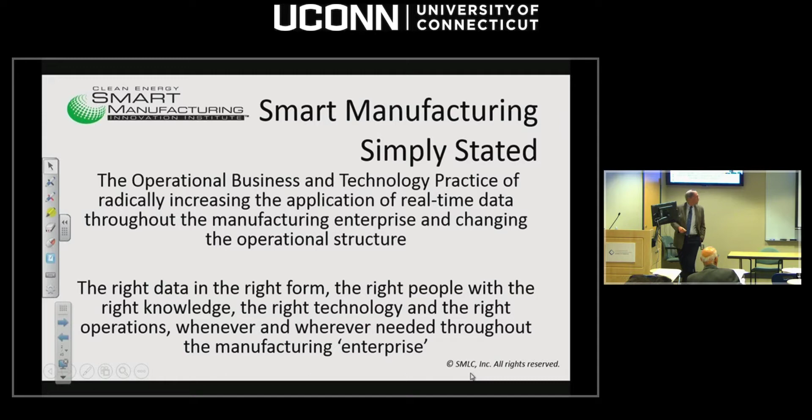The other one is a definition we've used quite a bit, and you can kind of read it from a data standpoint. Where the opportunity rests, we've looked at probably 100 different applications with different companies, different industry sectors, and so forth. And they all kind of boil down to these three areas. And I wanted to just kind of get these on the table and get the vocabulary on the table.

The first is very simply just untapped market productivity and performance. So if you can do things with the enterprise much more dynamically, there is a huge amount of opportunity. What we have tended to see is if you think about it from a revenue standpoint or a savings standpoint, almost everything we look at starts at about 15% and then goes up from there. So if you think about 15%, that's actually quite a substantial savings. And so you can think about number one as 15%, and then when you begin to understand the process from its enterprise standpoint, it goes up from there.

Real-time data and modeling to qualify materials. This is the part about if you can really understand the precision of the materials, really understand the precision of the parts that you're talking about, really understand where they're coming from, and if you can use data to drive this precision, there actually are significant revenue opportunities moving forward there, especially as we move into trade spaces that have more customization, value added to these different products that are based on individual customers.

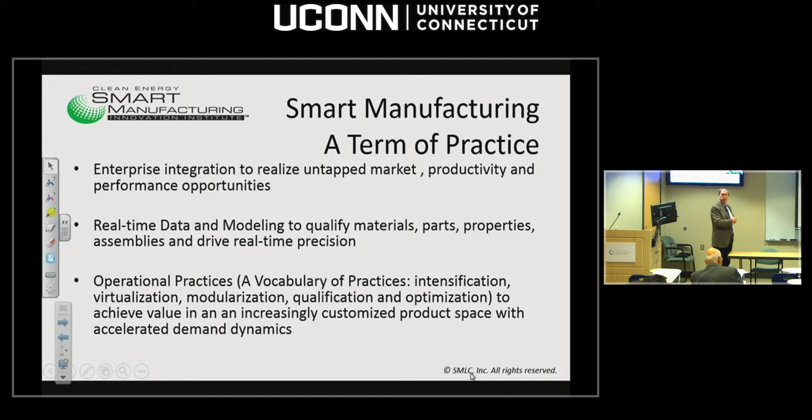It's really about dynamics and demand response, agility. How can you move among products, contracts, all sorts of things faster and more easily? And if you can do that, there actually is a great deal of market potential going forward. So this is what we mean by this, and we want to start talking about this as a term of practice. It's really not a technology.

There's a lot that gets put up here around Internet of Things and the Industrial Internet Consortium. And these are being used a lot. And I wanted to just stress with this slide that if you look at Internet of Things, it actually is extremely broad. So if you look at the two together, we're talking about consumer products, manufacturing, cities, agriculture, transportation.

So when you put all those together and think about the devices, yes, there's a huge number of devices that are being connected to various networks. But from a manufacturing standpoint, the breadth of those is so large, it's actually hard to get at the specific things that are peculiar to manufacturing. And so one of the things we want to do from a Smart Manufacturing Institute standpoint is actually look at IoT in a vertical sense and focus just on manufacturing.

So this list of things to the left has come through a lot of discussions with companies. What are the things that are peculiar to manufacturing that we really do need to take into account? I won't go through all of these, but it's actually quite interesting. One is I end up on a lot of panels about drones and driverless vehicles and manufacturing. So why do the three get put together? Well, they're all talking about cyberspaces. They're all talking about interconnected devices on networks, but they're very different, right?

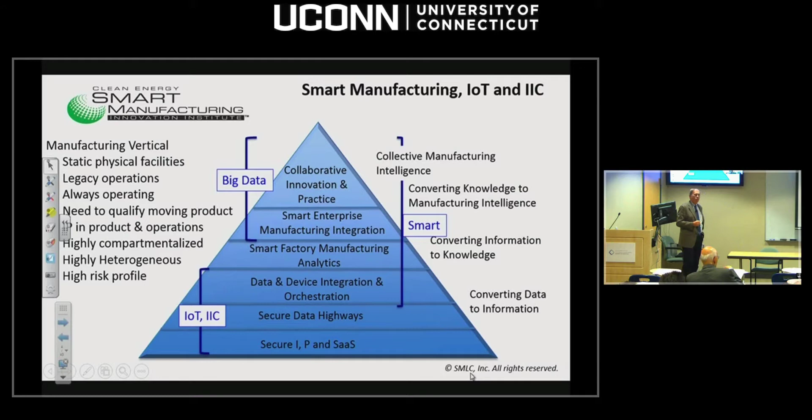And if you start moving up this pyramid, the pinnacle is what are the advantages of actually sharing some data or sharing some capabilities, sharing some patterns of activity, and where does reusability exist? So I'll talk about that a bit more in a minute as well. So I hope that gives you a little bit of a flavor for at least some definitions. And what I'd like to do is dive into some examples and tell you a little bit about what CESMII

is. First of all, CESMII as an institute is a collection of 5 regional manufacturing centers, as we call it. So you in Connecticut are actually associated with a regional manufacturing center, which we call the Northeast. And we base the operation at RPI, the Center for Automation Technologies and Systems, but it includes Connecticut, a major effort, major kinds of capabilities being brought to the table, as well as MIT with Penn State, and then the industry in the area is what is of great interest here.

And so you can think about the kinds of industries that are here. You start seeing capabilities building out. So with UTRC and aerospace, glass is large here, microelectronics and so forth. So these are the kinds of industries in your area that there's been a lot of expertise built up. And so what we're interested in doing is now embedding smart manufacturing in this region relative to those kinds of

industries. And if you go around the country, you'll see other areas of emphasis relative to the manufacturing companies. And this is a way for us to let these things develop with those differences around the country. So it's a powerful concept in our opinion. Anyway, it's the idea of how do you take the institute to manufacturing as opposed to trying to get the manufacturing to come to the institute. We want to take it back out this way.

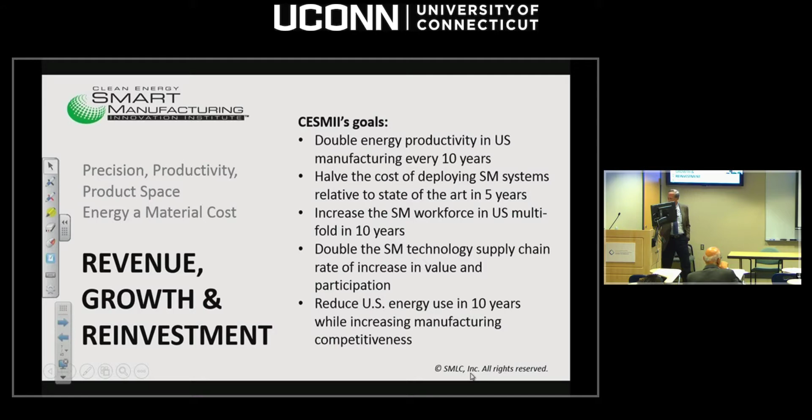So one of the things we will say over and over again is if you go after energy in its own right without dealing with productivity, workforce, all these sorts of things, you don't get there. But if you go after productivity, revenue, better use of materials and so forth, energy falls out and actually becomes a competitive advantage. So we're actually looking at not to reduce costs, but actually build manufacturing up in a way that there is growth and opportunity for reinvestment. And then that's how one can get at a reduced energy consumption.

Typically, what is the energy cost in manufacturing? What fraction? Well, let's see. If you look at it across the U.S. and across all energy, it's about a third. So third residential, third transportation, third industry, roughly speaking. No, like in manufacturing, what is the cost within a manufacturing facility typically? I guess it depends, but yeah, you mean in a facility? Right, it's a little hard to do. Labor. Yeah, it's hard to. It's actually hard to say because it depends on the segment, the industry sector.

But if I go back here, the DOE actually defined what they call energy-intensive industries. So these are oil and gas, chemical, cement, glass, and so forth. That actually represents probably about 75% of the manufacturing energy. If you get into aerospace and some of those which don't use energy, but the parts do, now you add up the rest of it. So even our institute is probably at about 20% of the total manufacturing energy use. Yeah, the other thing to point out too is well over 90% of manufacturing is in small companies, small and medium companies.

And so we're really talking about lots and lots of small companies, and then we have to work with a large company. So that's where the supply chain comes into play. It's an important question. So let me take you through a couple of really quick examples to kind of illustrate what smart manufacturing is about, and then I'll get into some of the technologies.

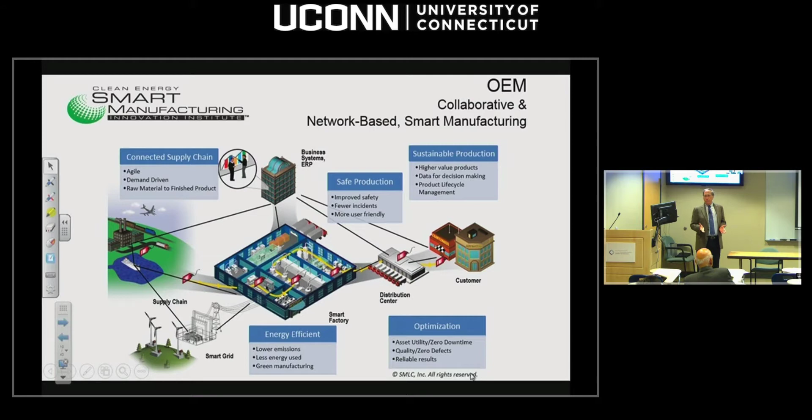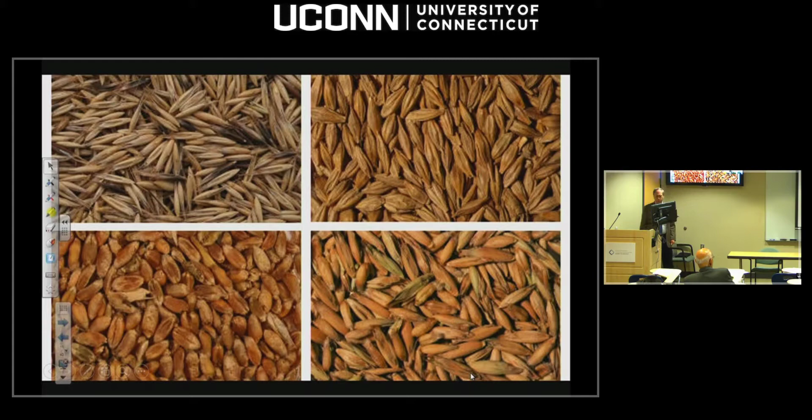Oh, I had the pictures out of order. This is the answer to an oat is not an oat is not an oat. They come in from all different kinds, but you have to make the Cheerios taste the same. So the supply chain side of this, though, is actually quite interesting.

This is actually a sort of a graphic of the bin management system, or the silos that exist at the Minneapolis plant. And you can see that those silos have all different kinds of characteristics of those oats sitting in those silos. So if I'm going to make a certain amount of Cheerios, I need to know which silo I can use for that. I need to know to avoid these other kinds of silos.

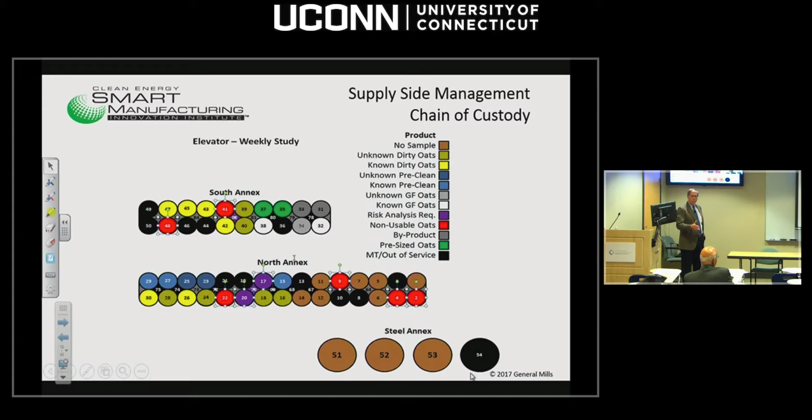So how do I know what I have in these silos at any given time with the variability of the raw materials coming in? That's actually been the problem that General Mills is wanting to solve, and they have been building some models out. So it's really a chain of custody model that's tied in with a recipe management kind of system. So smart manufacturing has been, how can I get all the way from the farm to Walmart end to end with the dynamics of the operation, the manufacturing, the supply chain in this particular case.

A different example, this is Praxair, Port Arthur, Texas. What you're looking at on the left is a little graphic of a steam methane reformer furnace. Just to give you the scale of this thing, it's about 5 stories tall. It's got 360 12-inch diameter tubes. You run methane in here, you break it down, and then the furnace heats it.

Well, what I'm trying to paint is a picture of a very large furnace for this particular reaction that's taking place. And those little things at the top, those are 96 burners that you use to control the heat distribution or energy distribution in the furnace. This thing's been around for 30 years. There's 900 of these around the world, and basically no one's been able to see inside the furnace because of the harsh conditions in order to manage this.

So what happens is you operate the furnace in a very conservative manner because you don't know what the energy distribution is inside, and you avoid burning out the tubes and mechanical failures and so forth. So the question was, what if we could see inside the furnace in real time? So what was done was to put 8 infrared cameras around the outside of this furnace so that you could see the entire geometry. You could also see around all the tubes, and you knew exactly what the energy distribution was.

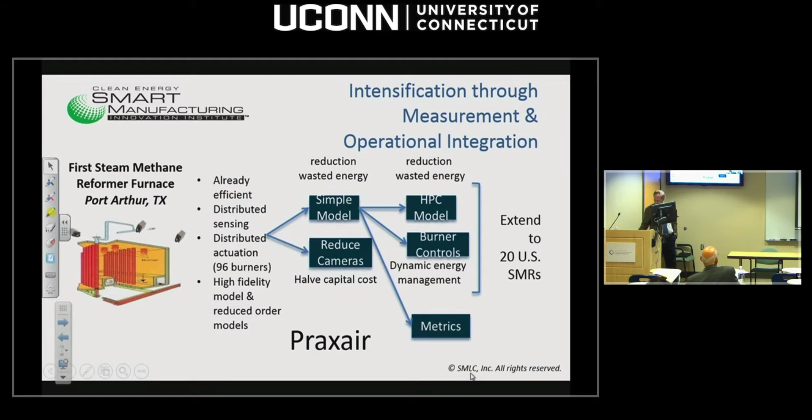In other words, in a smart manufacturing sense, this is about new sensors and new models, image, real-time control, MPC control, moving these things forward, and it's had significant impact on a legacy operation. And where it gets very interesting is Praxair has 20 of these around the country. They already manage their operations from a business standpoint, but what if you could see the operations from an operating standpoint?

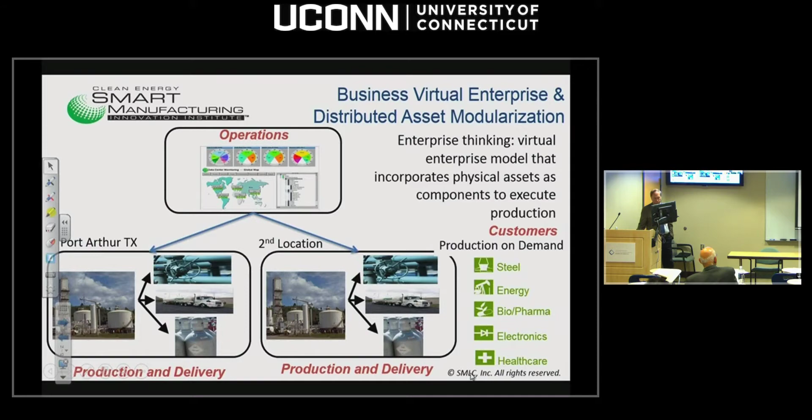So we go to Port Arthur, Texas, you go to the second location. The demand is changing around the country, so you can start adjusting the operations. And so now you get this sense of virtual enterprise on a national scale that's managing the physical facilities around the country, and you tie them in with the distribution chain. This is a huge energy savings for Praxair, but the essence of this one was not energy savings, it was actually energy productivity. They were able to make so much more product, they were making so much more money, that's where the gain came. So it wasn't a reduction in energy consumption, it was a significant increase in productivity.

And one more real quick one here, just to emphasize one other kind. This is in Scranton, Pennsylvania. This is a General Dynamics metals fabricator. They make anything that's got a concentric shape: artillery shells, pipe fittings, a variety of things made out of steel. The way it works is you bring in a steel billet on the left, you go into a forging press.

This is a massive piece of equipment. It heats it up, and then just presses a concentric hole inside that billet so that you get the general shape, but it's got to meet certain tolerances. You shape it, you go to a heat treatment furnace in the middle to basically set the metallurgical properties, and then you go to the machining side to actually shape the part to whatever the contract is requesting. This is an example of a legacy operation that's been around for a long time, where each of the operations was compartmentalized. So literally, you just got the part from the forging press, and then someone handed it over, and it kind of waited there for the heat treatment and so forth.

And so the smart manufacturing aspect of this was, what if I looked at the whole operation at one time? And what I could start doing when I did that is, what if I started managing the properties in real time? So the properties on the first part are geometrical, the properties in the second part are metallurgical, and then the properties on the right-hand side are finished product. What if I looked at those all together?

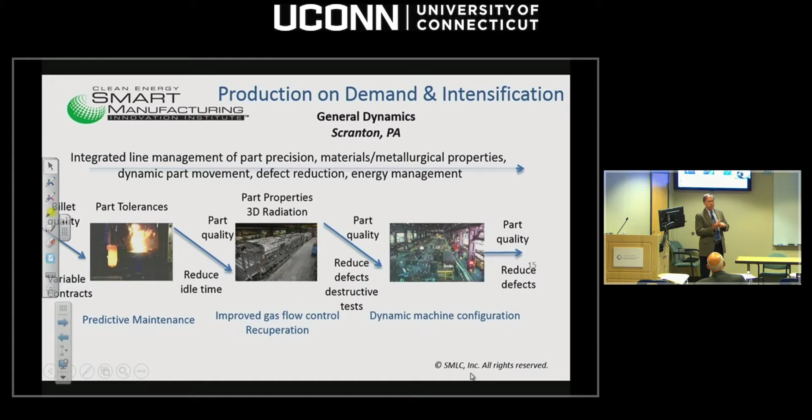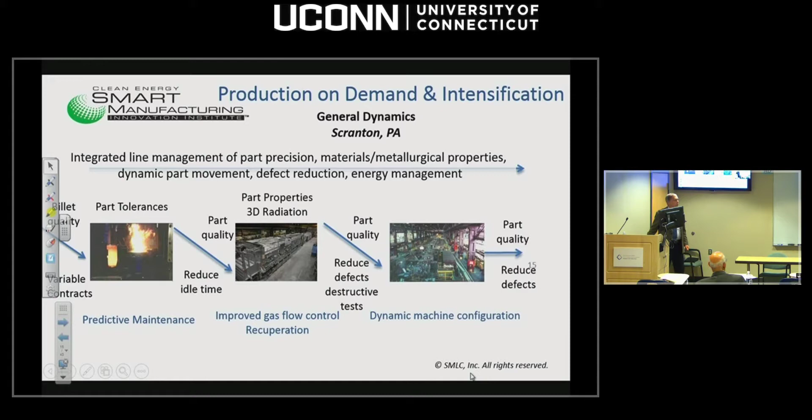Right now if you put a software system into a company, the multiplier factor of that installation is a huge number. It's a huge cost, and it tends to be a one-off system. And so the question is, how can we enable us to do it in a faster way? So, I stuck this one in.

So where we started going down actually has a lot of parallels with healthcare. So I thought I've stuck this in because maybe it relates to this. But if you think about what's been happening with healthcare, right now it's become less and less going to a single place. You go to an urgent care for this, or you may get more information from a pharmacy. There's more and more sensors, wearable sensors that are feeding data in, and so forth.

If you can get that stuff integrated in a right way, and you start working this from a patient record standpoint, if you can have that in an integrated fashion, your healthcare goes up. So we're actually trying to do the same thing, and quite honestly, the product in a manufacturing plant is not too different from us being the product in a healthcare system.

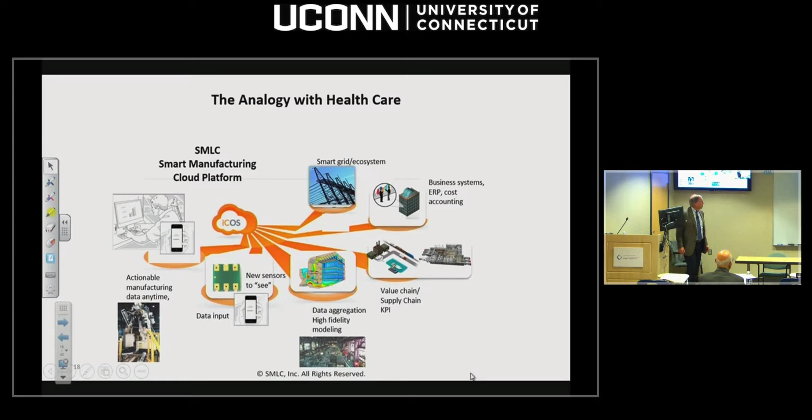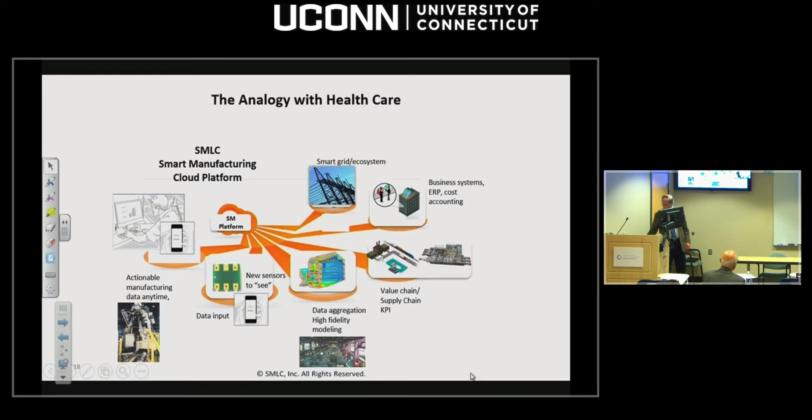So what we're really doing now is saying if I can overlay these different systems, modeling systems, data, input, interfaces, and so forth with an overall system, we should be able to enable this better. And what we call this platform is the Smart Manufacturing Platform. So what I'd like to do is take you through some of the things that we've been building out from that perspective and why. So I'm going to skip through the build on this.

So one of the things, and I was speaking to a couple of folks about this morning. When you look at the manufacturing space, there's a lot of discussion about automation and control, and that's very, very important on the factory side. There are the business systems. For the large companies, it tends to be SAP system. For the small companies, it tends to be Quicken or something like that. We all talk about design, data and design, training, analysis, the integration, and the engineering. So a lot of that is taught in basically every university and all the training.

But there's a space that's in between where you take the control level, we call it the micro level. What if I can extend that? What if I could put an integrated computational materials engineering model? What if I can improve the precision of that control system? The meso level gets at the manufacturing operational level. I'm making decisions about these different things, or about contracts and so forth, and I need to change out conditions. How can I do that in a better way?

And then the top level is basically the supply chain level, if I'm working across companies in different ways. A good example of this one is Corning glass out here. Corning actually makes glass. I guess that's a good reason to call it Corning glass. They make glass, but they contract the manufacture of the material for specialty glass from another company. So it's a supply chain, then they go make the glass. How could you bring those two together, even though they're two different companies, so that they operate in an integrated, controlled fashion? So this is the space that we're talking about.

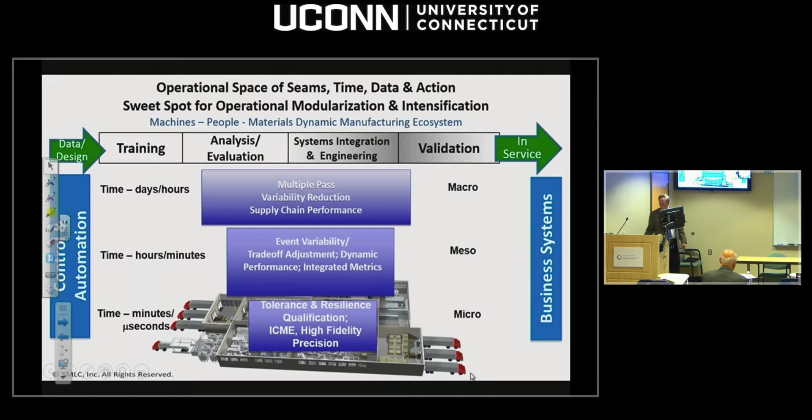And if you think about the Praxair example, it's the micro example. General Dynamics is the meso space. And then the General Mills example is the supply chain macro example. So how do you get the data and everything put together in an appropriate way? So we started looking at the characteristics of this. We just simply call it end-to-end system. If you look at every single system we put in, it has all these components. So no new news here. But variable sensors to some kind of actuation.

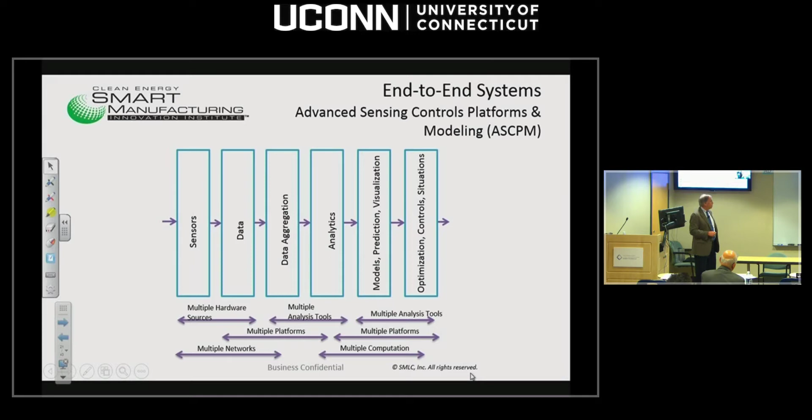But what's significant are these purple arrows underneath. Multiple hardware sources, multiple analysis tools, multiple vendors, multiple platforms, and so forth. These are the one-off systems that we've been talking about. And so when we talk about advanced sensing controls platforms and modeling, the acronym up here, we're actually talking about how do you work across a heterogeneous environment that's going to look like this.

So what we've been asking ourselves is, how do I unpack this, and how can I put some infrastructure in that's going to allow me to manage the integration of all these different systems as appropriate for some business objectives. So a way to look at this is if you look at a typical system, like in this MES space, you'll see the color coding will become apparent in a minute. But one of these one-off systems tends to have different providers, different analytics. It could be on-premise, could be off-premise, but it's all kind of mushed together.

And then if you want to connect it, you've got to connect it to another set of things that are mixed together as well. And now you get a more complicated mix of things. So the thing that we're trying to ask is, how do we unpack this? But the point is that if we keep building these systems up and then try to interconnect them this way, it's just not an efficient way, it's a costly way, and we're just simply not going to get there. And I will point out that it's not secure. It's just not a secure way to do it.

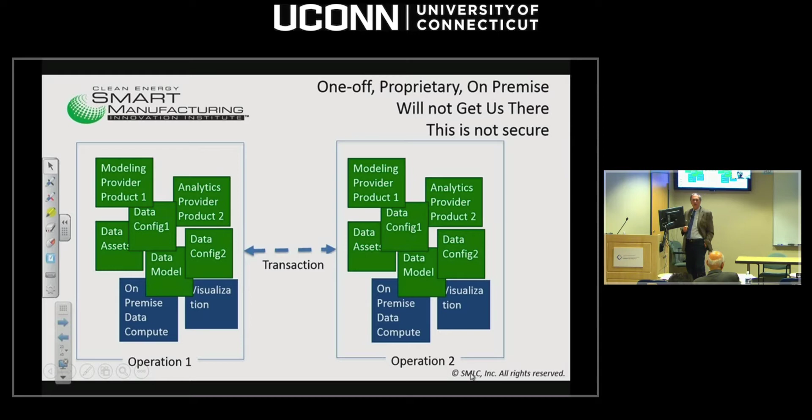And I'm trying to find a good way to stress this one, because if you're going to put these systems together, you have to ask yourself, what do I put them together with? You can think of different constructs, but the one that kept making sense to us, or at least was used most often, was workflow. And so what we're really trying to do with workflow is basically take stuff that tends to be tightly integrated and ask ourselves, can we unpack it and can we reuse it?

So you can see that I've taken data apart in 3 different broad areas, with the recognition that there's a lot more to this, but you have to select data, you have to have a data model, you have to be able to configure the data for different things, you have to configure it again, you get different vendors involved. But if you can unpack these things, at least as we've been building these out, you can reuse components of this and use this to spin up different projects more easily. And then, of course, there's the matter of on-premise and off-premise.

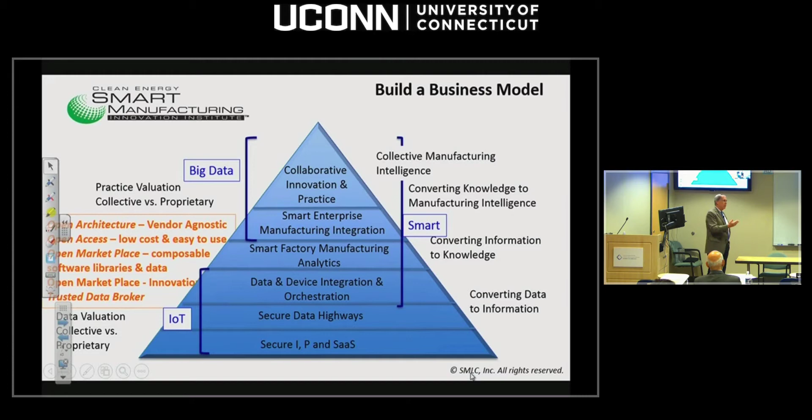But you need to have software of these libraries and the ability of the data services, and then the marketplace for the ability to put innovative products in there in different levels of products so that you get into the development phases going forward. And one of the most important things is the trusted data broker. So this is the notion that most companies don't want to share their data with a proprietary system. Alison, Tim, you can comment on this one. But if there could be a trusted data broker in the sense of a third party that is credible, now there's at least a more open discussion to have on that. So that's where we're trying to go with that piece.

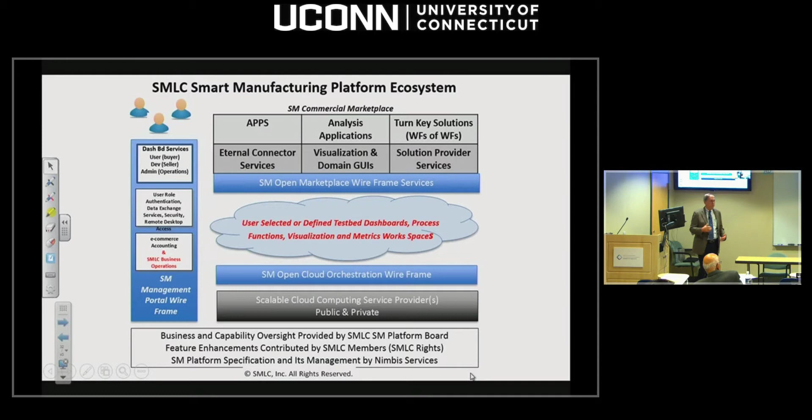But essentially what the SM platform is, and we use the term wireframe, it's a set of services that allows us to slide in this marketplace. It already provides the cloud management, orchestration, the security, those vertical bars that I was showing you. Those all exist, and what we do then is slide in, as I said, the commercial application pieces, and then we can start doing this composability. So we've been building this out for a while. This is what it looks like.

So the marketplace is where you'll have all these vendors providing. Yeah. Actually, we have a deployment layer which can stay more steady, but people do slot things in and out. But the marketplace is much more selectable. It's more the direct application space. Are there fees for that, or?

Yeah. Well, let's see. Some of this is to be determined, but the idea is the wireframe does not cost anything. It's part of the institute. And then the applications in there will depend on what they are. Those will be fee for service in the production sense, but as they're developed, they're just part of the projects going forward.

But if you think about this, and I put a very quick list over here, these are really quite powerful concepts. One is the notion of certified app configurations. So that's different than certified software. It's if this application has been used for a steam methane reformer, I can know that it was used for this kind of steam methane reformer and then have that validated.

There is a very important notion here that you have to kind of think about a bit. If you go back to the internet, one of the things that was most powerful was not a lot of complexity. It was actually just a huge amount of stuff that's actually pretty simple, but you had a search engine that you could find it.

And so one of the things that's really quite interesting to us in this configuration space is with the cloud, we now have the capacity to build that configuration space into a huge, just like an app store. It could be a huge amount of variations and different pieces, just slight variations. But if you could have a search engine to find them, you actually get to something that's internet-like from a manufacturing standpoint. And if you can compose and reuse those, now you've got something that is quite powerful.

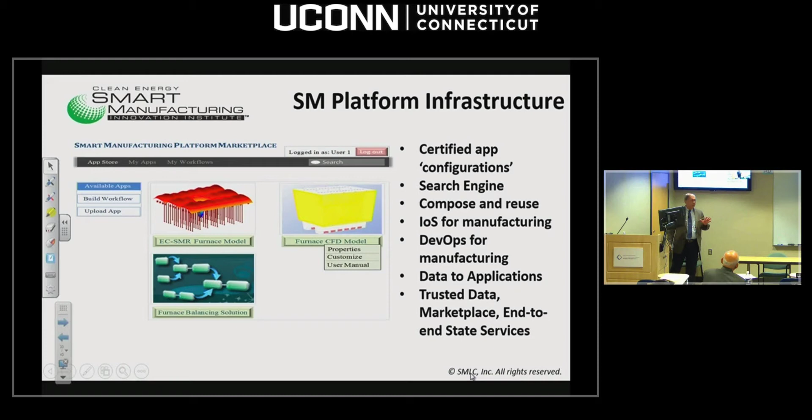I did want to emphasize DevOps for manufacturing. So one of the most powerful concepts, I would argue, is the ability to try something out, see how it works in an operational setting, learn something, and then change it, as opposed to doing a massive design and having it try to stick for multiple years. And what we are down the path now with these sorts of things is that development approach that starts looking like we do in the IT space. And again, I'm putting concepts out here because we have to develop these from an institute standpoint.

But what we have been able to do with the projects to date is that we go in this marketplace, we create these test beds by just simply building up an account. We can spin up different accounts for different kinds of modeling, different modeling efforts, different projects, and so forth. So this is actually what the steam methane reformer project looked like. We had 4 or 5 projects going at the same time with different people being involved, using the data in different ways, and they had different accounts.

I'm running out of time, so I'll skip through a couple of things. Another idea I wanted to leave you with is security is really important in these systems, but actually security is a friend, not just an enemy here. So one of the things we can do is as we build out these configurations, what you can do in the cloud is just use security to manage those.

So what we're doing is just using public key, private key, so it's a fairly simple kind of security mechanism, but if the data for the metrics modeling needs to be constricted in some way for that particular team and a different way for another project, you actually can now, in a very granular way, use security to say this group can use, this group cannot use this data. And so you get this granular management of the data. And then the granular management of data actually helps the security of the system anyway.

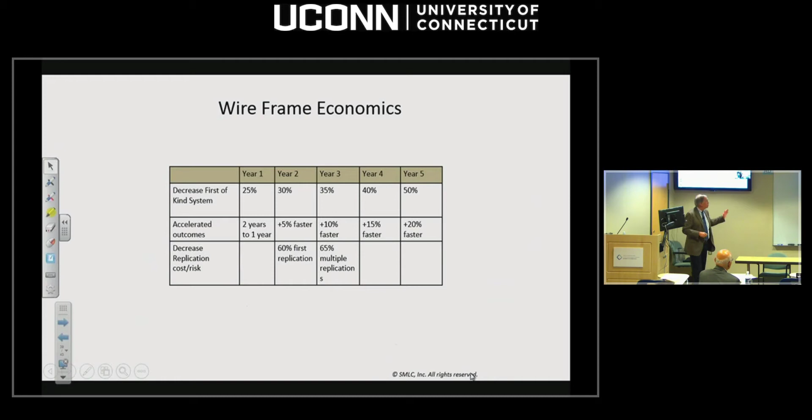If you look at the economics of having this kind of enabling capability, it actually becomes significant. So across the several projects that we've done so far, you can start seeing the acceleration. The acceleration is tremendous because you don't need to reinvent everything from the software as a service level. And then as we build out these first of a kind, this DevOps kind of approach actually starts accumulating capability. That's what the top row is basically suggesting.

So I will end with why is UCLA interested in this kind of project? So University of Connecticut can think about this as well. So the research funding reallocated to institutes, that's the obvious one. The public-private partnership. But we've been asking ourselves, what's the value of data and algorithms that are developed on the campus? And can we put those into operation better? So we're looking at it heavily as a tech transfer mechanism, and obviously a way to get access to the problems. We were talking about that this morning.

The researcher capabilities and discovery, and cross-linking that across the entire country. So the ability to work with researchers. And then the platform actually gives a way for the researchers or the industry to come together and work together on these. I haven't stressed it too much, but workforce training, education is actually the key to all of this. So how do we start building up the analytics, data capability in the operations space, and not just the information technology? And then there's a public mission piece of this. UCLA was interested in all of these, from a state as well as a national standpoint. So when I sold this to the chancellor, this is the list of things I talked through with Gene Block. But anyway, let me end there.